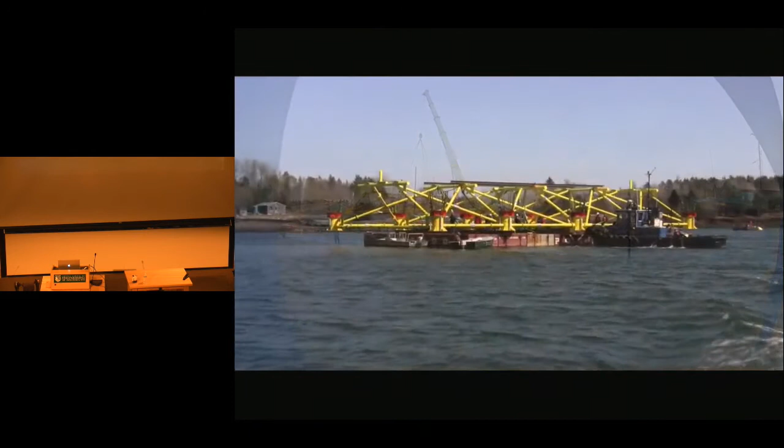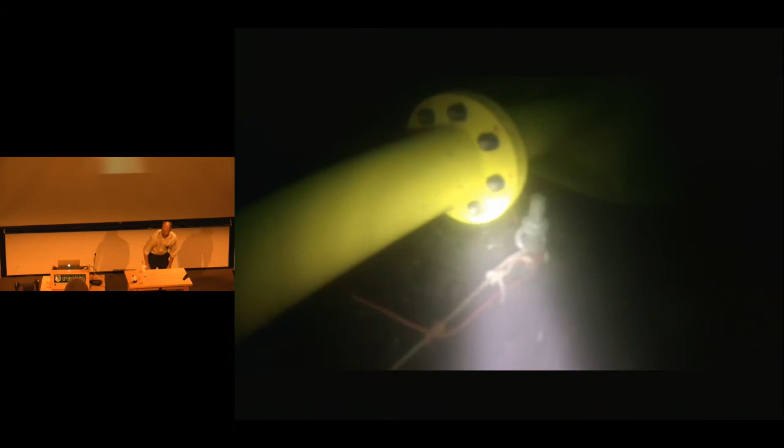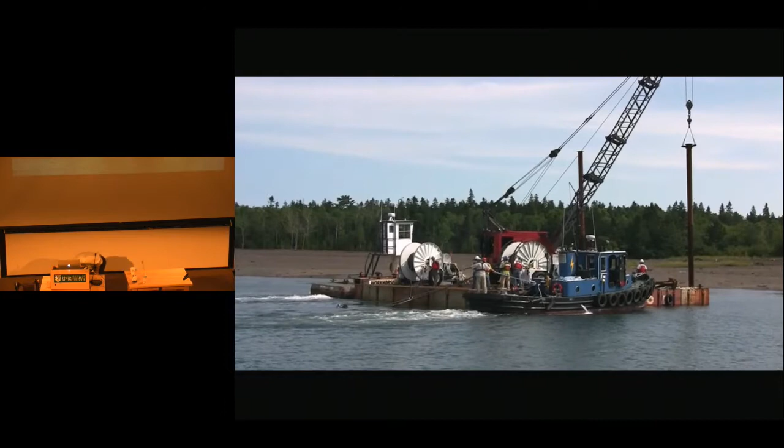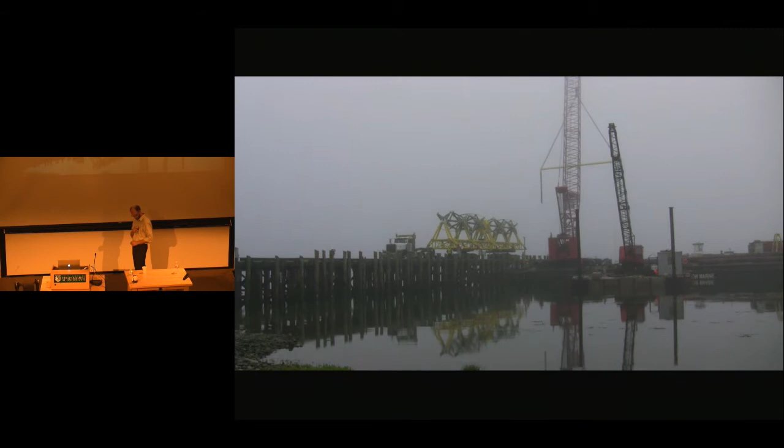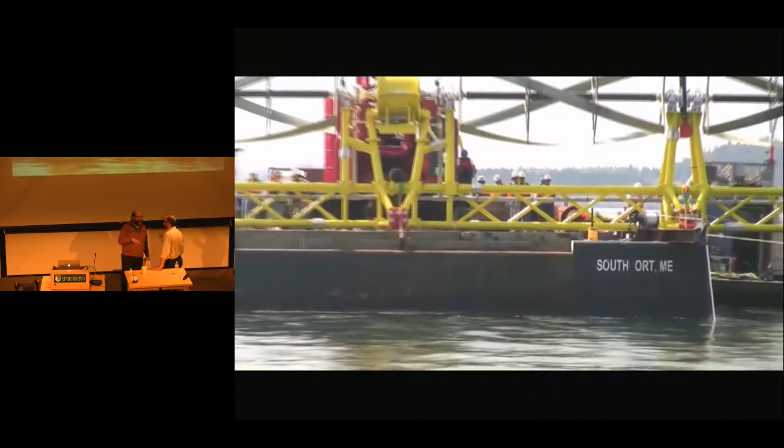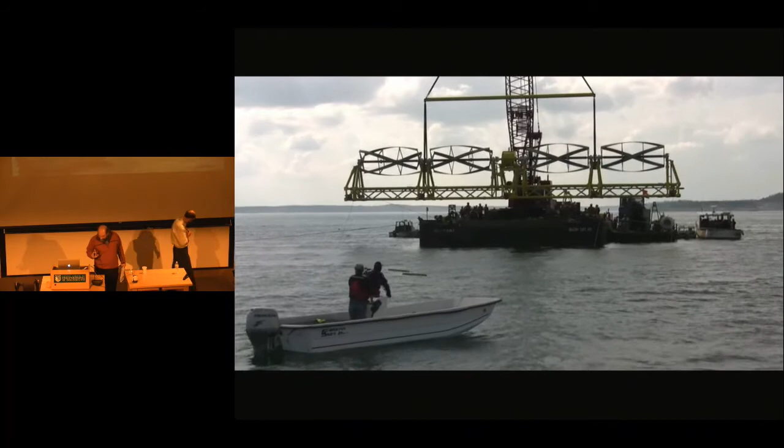Do you have the tone? I took it off. Oh yeah, all right.

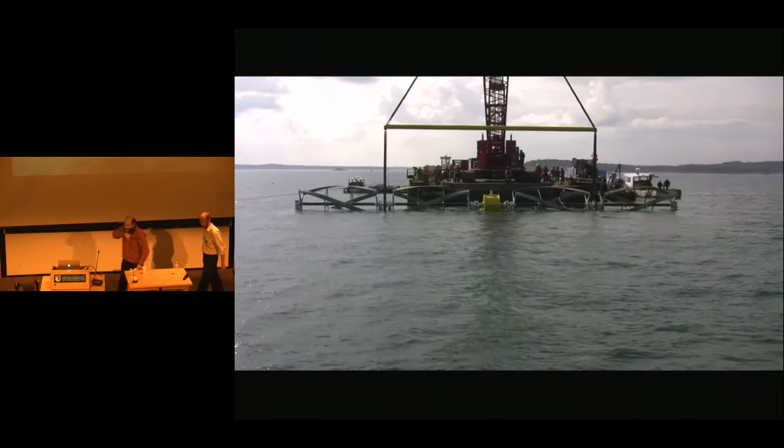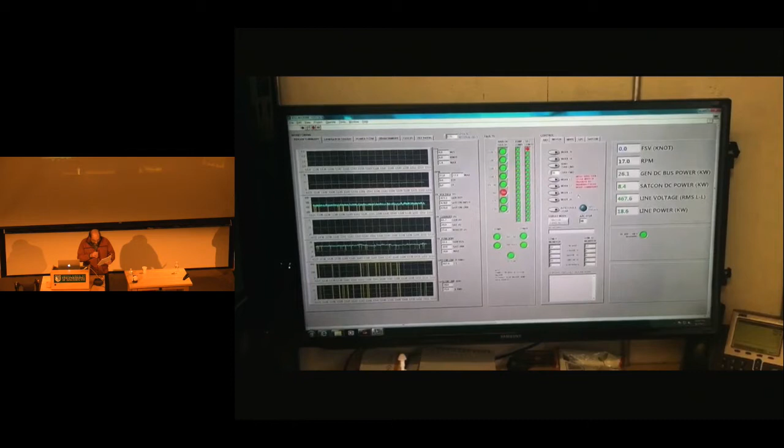Good afternoon, everyone. Our speaker today is Jarlath McEntee. I introduced him earlier today as a real engineer, meaning he's actually licensed by the state of Maine to call himself an engineer, something I haven't achieved yet. Jarlath was also a classmate of mine some time ago, and he's here to talk to us today about technical innovation in a regulated world, how to do something new in a world full of rules. A little synopsis of his career: he's the Vice President of Engineering for ORPC and the Chief Technology Officer for the same company. He drives development of the company's proprietary hydrokinetic energy technology. He earned his Bachelor of Science in Engineering at University College Dublin in Ireland in 1986, and his Master of Science at Dartmouth College in 1989. He comes to ORPC after spending more than 25 years in engineering and project management, having developed technical expertise in tidal power turbines, combined heat and power systems, Stirling engines and refrigeration systems, control systems design and analysis, micromechanical structures, and marine engineering systems. Please welcome our speaker.

So first of all, it's really a real pleasure to be... what about it, turn it off. Class. Okay. We're getting there. Should be on, yes, the little green light is on. All right, sorry about that everybody, it was my screw up. Hopefully we'll work now. So this is on? Doesn't sound like it. Oh, okay. All right.

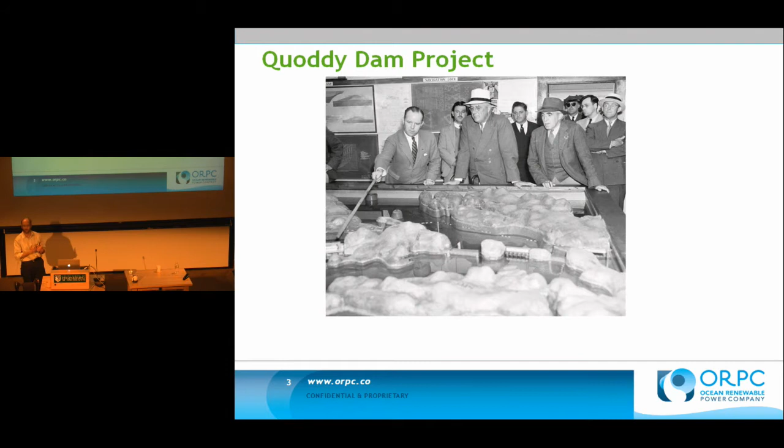The other main electrification project happening at the same time was the Tennessee Valley Authority. Now, one of these you hear about and one of them you don't. The TVA got funding from Congress to continue the work, and the Quoddy Dam Project had its funding cut.

Around the Cape Cod area, we really don't have very much in the way of tide height, and as you work your way down east along that coast, the tidal ranges increase quite dramatically. About midway up the coast where Eastport is, you'll have a tidal range of about 20 feet in a normal tide. And as you make your way up to that prong at the head of Nova Scotia in Minas Passage, tidal heights reach the range of 40 feet on a daily basis.

So there's a lot of energy here, and the question is why that's happening with this kind of geometry. If you think about it, seaward of Georges Bank, this shallow area where fishing happens, we've got tidal constituents, tidal forcing functions actuating on the ocean, creating a tidal resonance in that bay. So basically it's simply a big bathtub where the tides are sloshing in and out, and as you go further up into the channel, that amplitude of oscillation is increased.

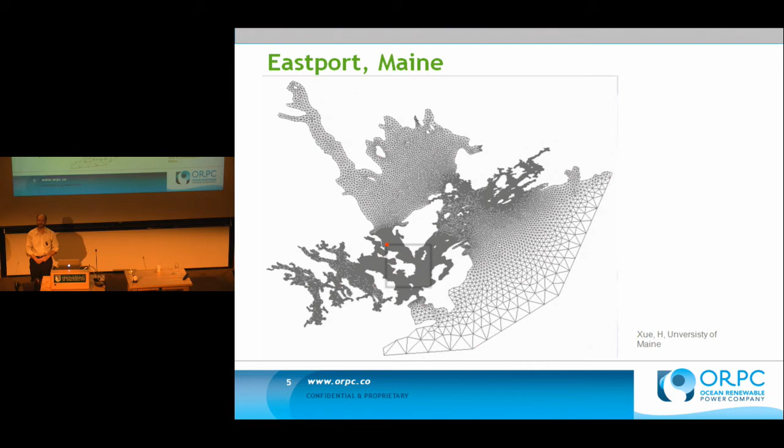The other side of the island of Eastport is Head Harbor Passage, which is one of the main shipping routes up into Canada, with very large tanker traffic through that channel. On both sides of the peninsula are actually the areas where ORPC is interested in developing projects, because that's where we have strong water flows.

One of the interesting things about the tides in Cook Inlet is they are very large, but there's also a very significant phase shift from one end of the inlet to the other, about a 3-hour delay in the tide.

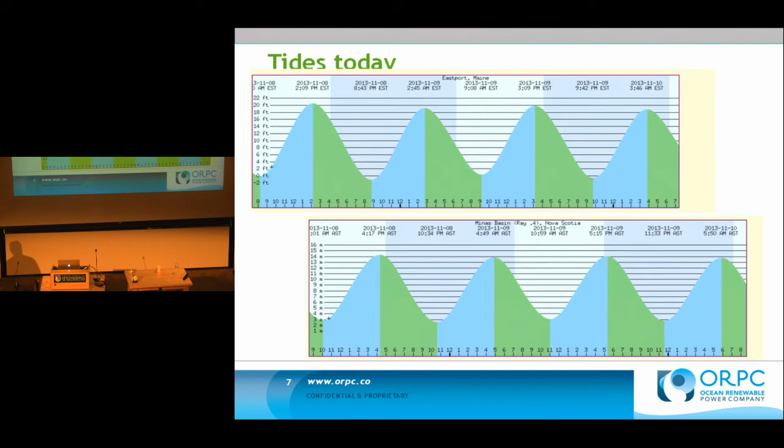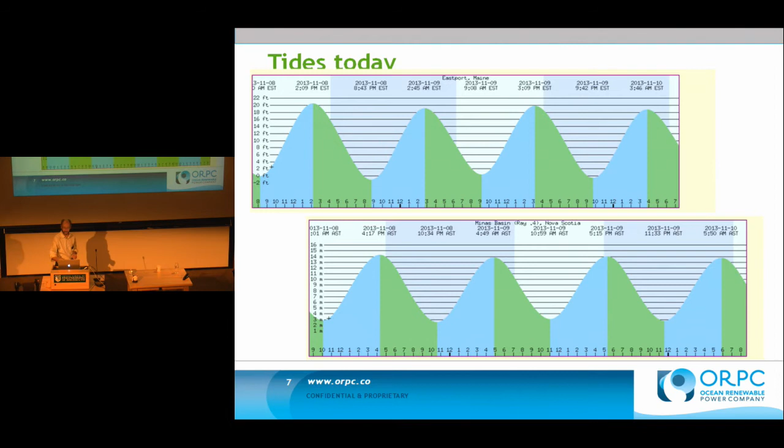I want to contrast that with wind, which is sort of a statistical, stochastic process—you get a gust, you may get a storm next week, you may get no wind for a week. It's a very intermittent resource. Tides are very predictable and pretty much always there.

In terms of the United States, I want to preface this by saying the U.S. is actually not the world leader in tidal resource. We've got good tides in Maine, Alaska, and Puget Sound in Washington, but other places are a little on the weak side.

What we do have is wave resources off the West Coast—very significant wave potential in the Oregon, Washington, and Northern California coasts. Between the two marine renewable technologies, wave and tidal, we're estimating that we could potentially serve 7 to 10% of U.S. national electric consumption. That's a pretty significant new renewable energy resource that no one's actually taken advantage of, and as we look to the future, we hope that becomes a reality we can deliver on.

Europe has a much higher potential. I don't have the exact numbers, but if you look at places like the Pentland Firth, the north coast, the coast of Normandy, and various other places near the North Sea, you have some extremely strong tides.

The other thing that's interesting when you look at developing power from the oceans is that the human population is moving towards the coasts. Right now in the world, 70% of the world's population lives within 200 miles of the coast, and that's actually increasing. People gravitate towards the coast—take a look at a night map of the United States and you see blinding lights on the east and west coast and a lot of dark spaces in between, other than maybe Chicago.

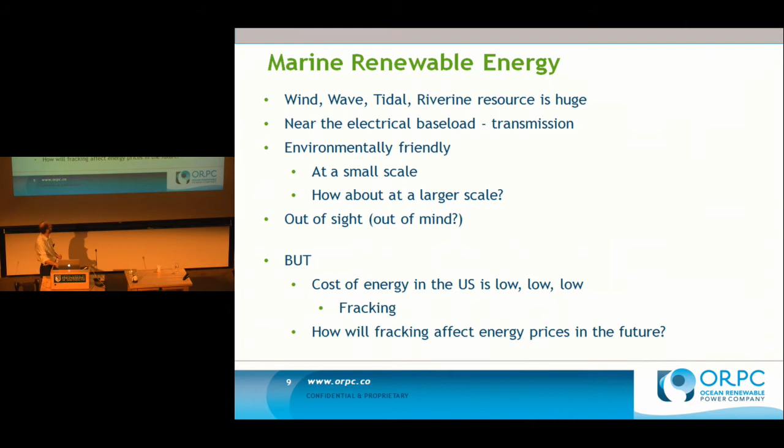So ORPC was established in 2004. The general idea was that we were going to develop projects. We were going to buy technology from someone else. And we saw all these wonderful pictures from European companies about these wonderful tidal turbines that they were developing, and then we go talk to them about buying them, and you found that you couldn't buy them. They didn't really exist. They weren't tested.

So we started developing technology of our own. We went through a technology selection process and came upon the particular arrangement that we have, which I'll talk about in a minute. And over the years, as we developed this technology and as we developed the project in Eastport, Maine, we've become somewhat of leaders in the U.S. in terms of permitting these projects and how to get them licensed. We've developed relationships with the regulatory agencies, with the communities, and a lot of other stakeholders. And that's actually been a very valuable thing for us as a company. We have very, very good public acceptance of our technology in the state of Maine, very good PR, frankly, and people want us to actually come to their communities and help them install these kind of technologies.

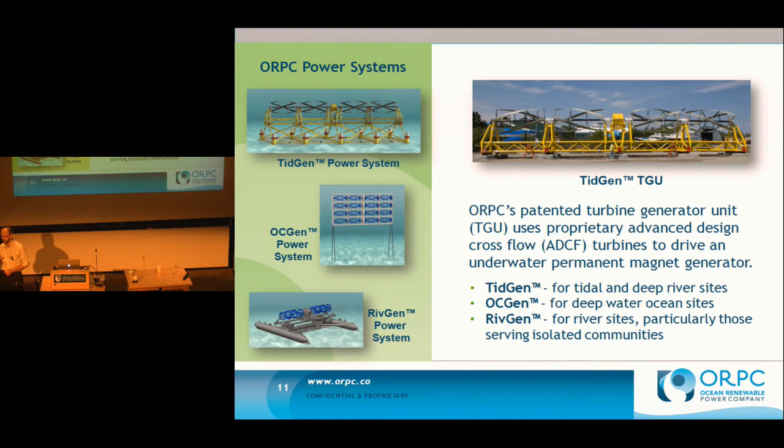All the technologies, they're all similar. They're all cross-flow turbine technologies. So this is sort of like an underwater windmill of a different type than you've seen before. They're all direct drive machines. There are no gearboxes involved. We took a decision earlier on that we wanted to minimize the mechanical complexity. And they're right now all permanent magnet generators, which generate DC power, which is transmitted to shore.

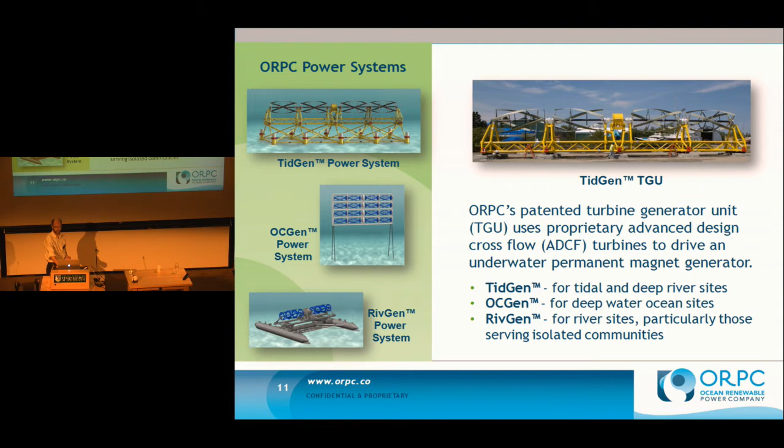I'll talk a little bit about the differences in these different hydrokinetic turbine technologies and maybe give you a feeling for why we chose one type over another.

In the late 70s and early 80s, in the wind industry, there was quite a lot of work going on in what are called axial flow machines. This is a cross-section of an axial flow turbine, basically your standard three-bladed wind turbine that you see everywhere now. It's the technology that won out in the wind industry for good reasons.

It's efficient, relatively low cost to build, and reliable. The other technology being developed at that same time was cross-flow technology, which is what we chose. The initial test results from cross-flow testing showed this technology wasn't as reliable as the axial flow machine. There were a lot of early-stage failures in cross-flow turbine technology.

Many of them out in the Altamont Pass in California. I don't know if anybody's driven through areas of Southern California where suddenly you come to a valley with towers and towers and towers of windmills, various designs. It was really a test center for various wind turbine designs in the 70s and 80s.

But there are certain things about this turbine that we actually like from a marine environment, and it's preferable to us to follow this technology route rather than the axial flow machine. These cross-flow turbines are actually beginning to see a resurgence in the wind industry as well, particularly in the small-scale domestic wind turbine business, and also in offshore floating wind. There's a couple of advantages they offer in the floating wind market.

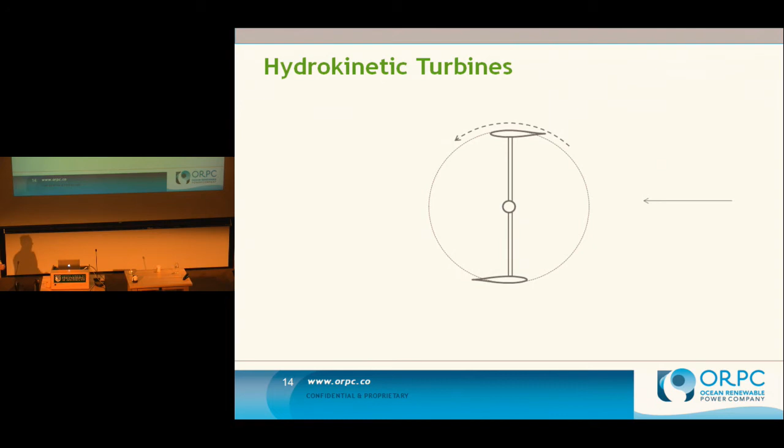This is a big advantage when you're trying to minimize the amount of mechanical structure and systems on a turbine. If you think again to your onshore wind turbine, it actually has to rotate into the wind. With a cross-flow vertical turbine, it doesn't have to do that—it just sits there and accepts wind from all directions.

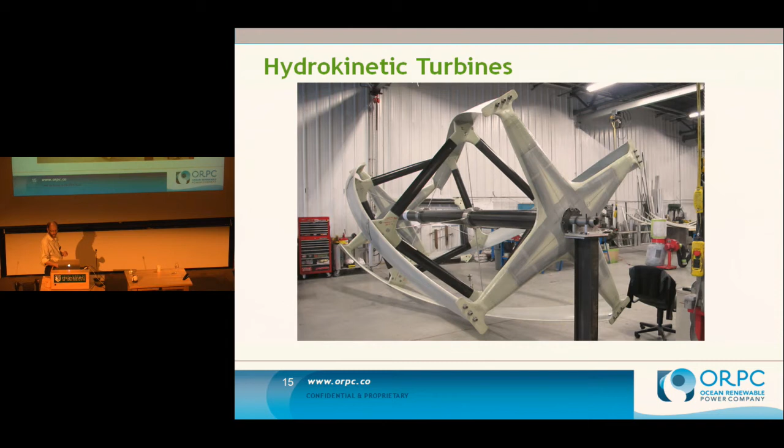Brendan's here, but if you want to look at Dr. Brendan Epps' models, you can get a sense of some of the torque variations that happen in a 2D model. The problem with this complicated helical 3D shape is that it's somewhat of a bear to do any kind of analysis on—it's a geometry problem that's befuddled me for 5 years.

Let me go back to the CFD stuff for a minute because some people might be interested in it, and it gets back to the work that Dr. Brendan Epps is doing here.

CFD, computational fluid dynamics - when I was doing my work for you, we were using Fluent, and Fluent back then wouldn't allow any kind of curvilinear boundary. It was basically block structures in 2D. The code was written in Fortran, and I got to look at it at the time - even I thought it was pretty ugly code. Fluent today is now a world leader in computational fluid dynamics, based over in West Lebanon.

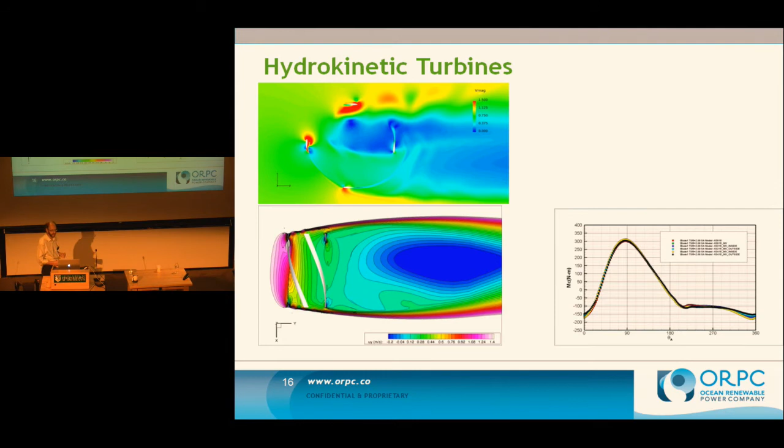The major area of research is still not quite right for cross-flow turbines. This makes me think there are problems elsewhere in CFD - the turbulence models that fit into these CFD codes need quite a lot more work done on them, I think.

The electrical generation - as I mentioned, we have a direct drive generator, so basically all 4 of our turbines in that TidGen unit are on one shaft. They rotate the shaft. We've got a permanent magnet generator. The voltage is proportional to RPM, so we've got a variable AC output from that generator.

We can't connect that to the grid. So what we do is locally rectify that to DC, transmit it to shore as DC, and then invert it locally to AC and feed it into the grid.

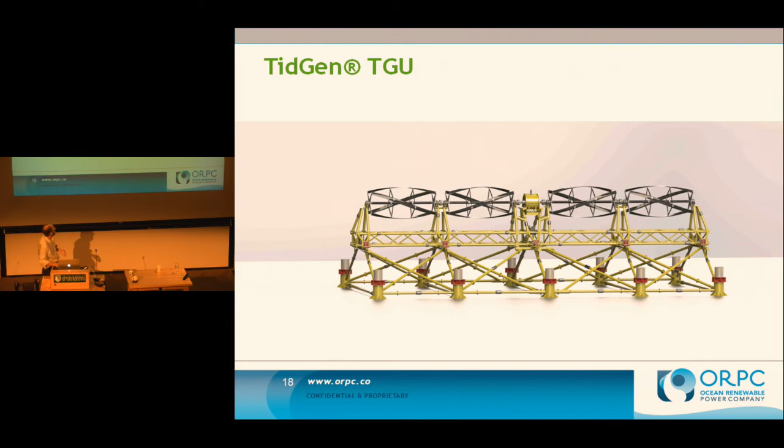There's an image of our system. You can see the 4 turbines, the common drive line. All that yellow upper structure sits on a bottom frame - that yellow lower structure is our foundation frame for the unit.

One of the reasons for doing DC transmission - if you look at offshore wind projects, you see people talking about high voltage DC transmission for multi-megawatt units 25 miles offshore. One reason is that DC transmission can be very efficient, especially at high voltage.

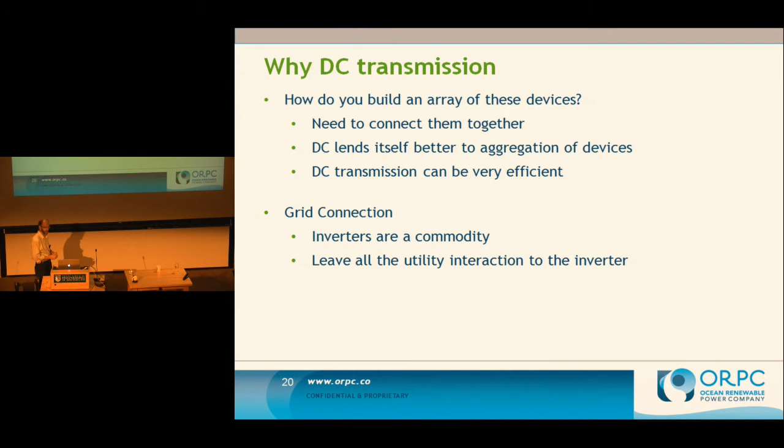But the reason we're primarily interested in DC transmission is that we have multiple units in an array out in a bay. We want to connect those units together and transmit that power back to shore in a single cable. We also want each unit to operate independently, at a separate RPM - we don't want to synchronize them. So DC offers a nice ability to do that. It's basically like connecting batteries together.

I just want to go through briefly some of the technology development.

2004, 2005 - you got to start small. You don't have any money, and you got to do things a little bit rough. So we made our first turbines out of wood, steamed in a steam box and made by a ship's carpenter up in Eastport, covered in epoxy.

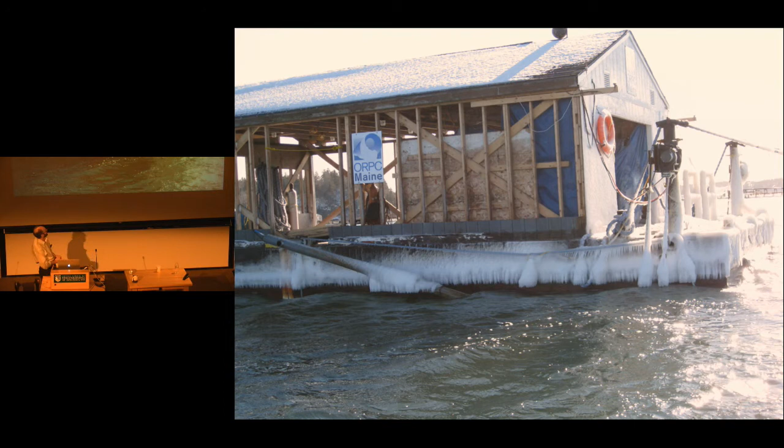And it worked. But part of the other problem about doing testing in Eastport in the winter is that you get kind of cold. So this is a typical day after a rainstorm the night before - the first day's work is to go chip the ice off the test vessel.

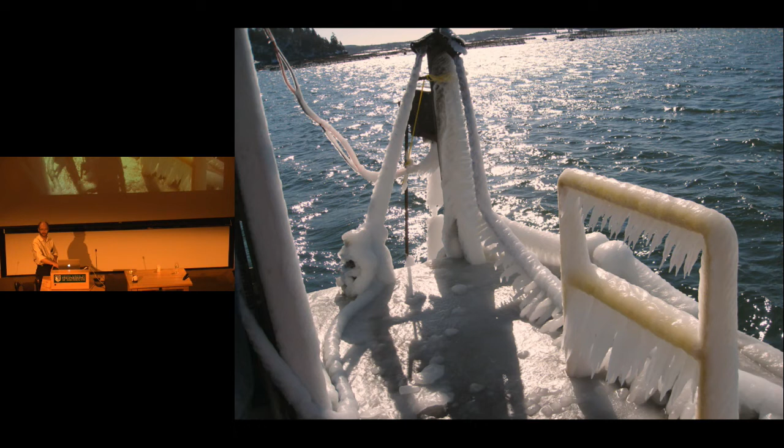We had an admiral from the Navy. Never have an admiral from the Navy as a technical advisor. His attitude was, you have no creature comforts - you can't have any walls on the vessel, you'll get blown around by the wind, no coffee, no pizza. He never showed up for the testing.

So we improved the test systems a little bit. We got a little smarter and decided to do the test work in the summer when the days are longer and it's a little bit warmer.

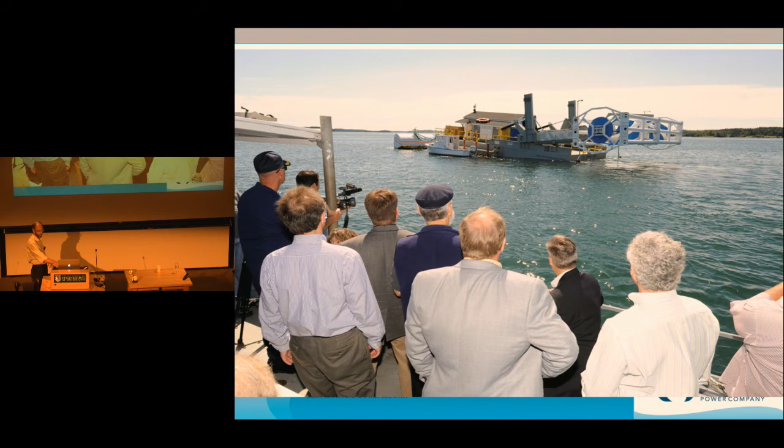We built a nice deployment vessel, which we actually just transferred ownership of to Maine Maritime Academy last week. We built our new set of turbines - you can barely see them behind the framework. And we started doing some testing again in the middle of the summer. Very nice.

It's pretty impressive to be sitting out there with 6-knot flows.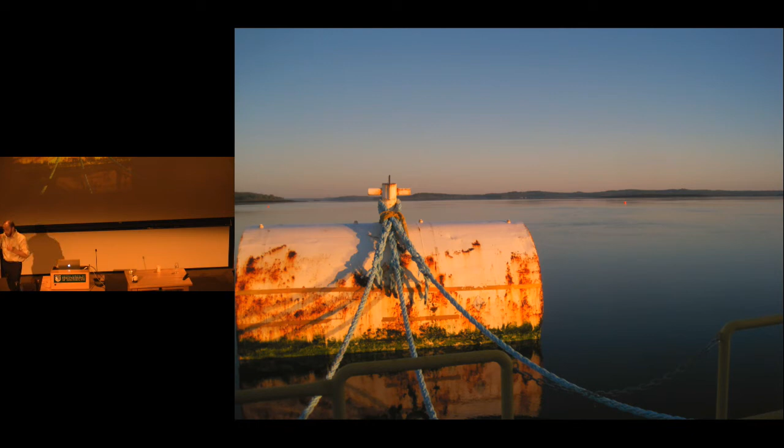One of the issues about tides is even though they're very predictable, they don't actually happen the same time every day, so there's a time shift over time. So if you want to do a 24-hour test, or get certain tide states, you end up going out on the water at weird times of the night or morning.

This is just one of my favorite pictures from doing an overnight test on the Energy Tide 2 in Cobscook Bay on a nice summer day.

All of that precursor test work is about developing the technology, understanding the technology. The next stage is to actually build it up into a product, into something that can be installed as part of a project. That's the real focus of ORPC in the last 3 years - to develop our TidGen project, our TidGen power system, and install it in Cobscook Bay.

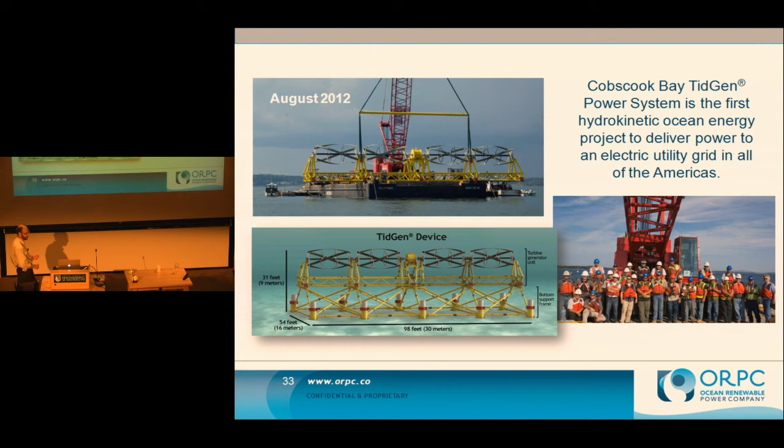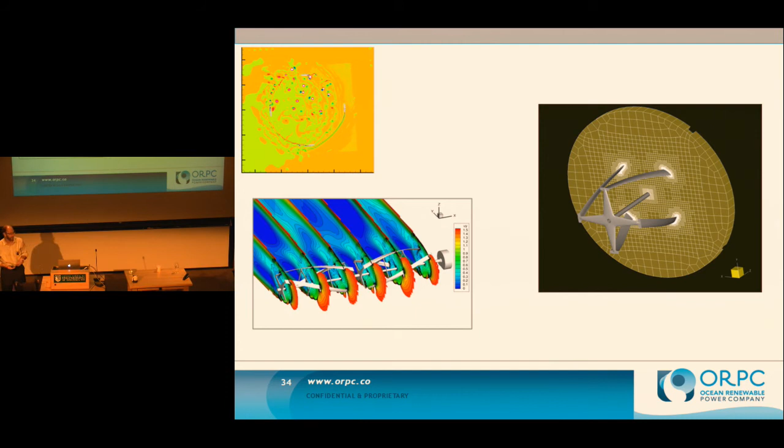We'll go through that. To get to that point, we really had to step up our game in CFD modeling, as I said. We were a lot more sophisticated in our modeling tools, and a lot more sophisticated in understanding the site conditions.

Before, we were talking about doing testing off a barge - you could just throw out a mooring and moor the unit there. Now we actually got to stick this thing to the bottom and hopefully have it stay there.

There have been some high-profile failures of people who put their units down and they fell over, or punched through the sea floor, or got their location off by 50 meters and the flow speeds were different than they had designed for and the blades fell apart. So site characterization is really critical.

We don't know enough yet - there's still a lot of work each and every time you put a unit down and decide where it goes.

So as an example of some of the work, we did some geophysical bathymetry work. You're looking for the depths, the type of bottom, doing some ground penetrating sonar to look for bedrock underneath. You're mapping out all kinds of things.

To confirm that, you actually have to go out and do geotechnical drilling. You've got to go get soil samples from different areas. And doing geotechnical drilling from a rig that's moored in 100 feet of water with a drill casing going down 100 feet, it's about that much around, at 3 meters per second,

suddenly you find some vortex shedding events that are pretty impressive. So we have images of the drill casing swinging sideways about a foot.

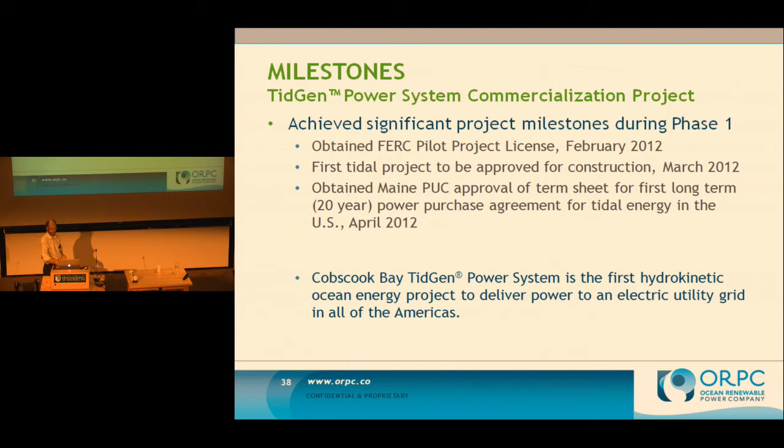This project is the first hydrokinetic ocean project to deliver energy to any utility grid in the Americas. So ORPC has gone from a pretty small company in 2005 and 2006 doing testing with wooden blades handmade in Eastport, to being a world leader—the leader in the United States, and if not in Canada. It's a pretty impressive roller coaster we've been on, and we're still going up.

Some pictures of the project installation: turbines on the top left, the turbine generator unit on the top right, installing the bottom support frame for the first time over here, installing the TGU for the first time over here. That video I showed looping earlier had a lot of the installation time lapses—we can take a look at that maybe if we have time.

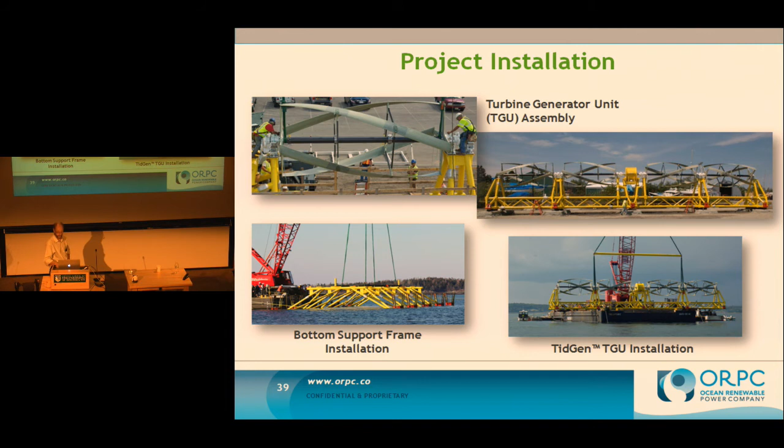So that's a lot of technology being developed. Some of it's new, some of it's just basic applied engineering—it helps to get the details right and do your work well. As I said, some of it's new: the CFD modeling stuff is cutting edge, and some of the electrical design work is cutting edge.

But all of that comes together into this wonderful project, or product, and you can't do anything with it unless you can bring it to market, unless you can install it and operate it. To install and operate a system like this in the United States requires going through a federal and state licensing process. The federal licensing process is the Federal Energy Regulatory Commission's licensing process for hydrokinetic projects, which is based off the same process used to construct, permit, and operate the Grand Coulee Dam.

So if you take something that has the potential size of the Hoover Dam and the Grand Coulee Dam, that same process needs to be gone through for our little 150 kilowatt generator. And I noticed today that the power usage for this building is something in the order of 400 kilowatts on an average basis, so we're talking about 3 of these things to run this building.

We've got to do an extensive agency consultation process and feedback process, listening to a lot of people, getting feedback from a lot of different agencies. That's at the state level, that's at the federal level. The federal agencies involved are a snapshot of all our federal agencies and processes, including the National Environmental Policy Act, the Marine Mammal Protection Act, water quality things, all the way across.

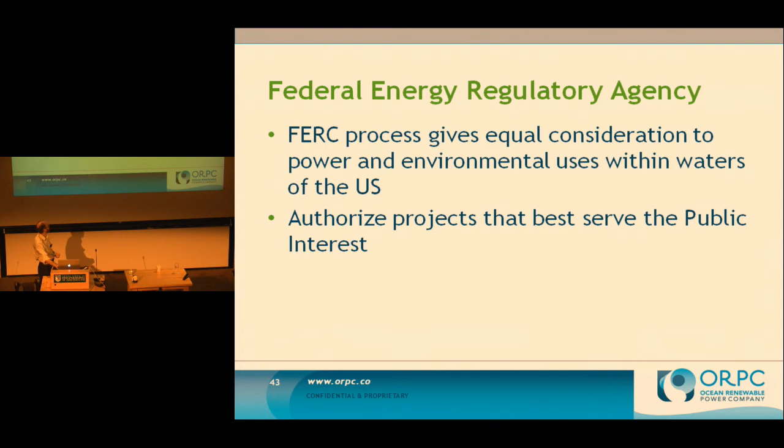FERC's mandate is to give equal consideration to power and to environmental uses, and that's a balancing act they have to make. Does it make sense to dam a river and create power from it, or is it better to leave it open as a canoe waterway? That's their decision to make, and it's not an easy decision. These projects have to serve the best public interest, and that's a high barrier to get through.

FERC also acts as a sort of clearinghouse. They actually don't do much of the work themselves. They sit in Washington and ask other people to provide their comments, so it's a distributed decision-making process.

Some of the federal agencies involved include the U.S. Fish and Wildlife Service, which has a statutory mandate to protect endangered species in the United States. I want to use those words again, statutory mandate — you told them this is the law, they have to do it. So if there's a salmon run in Eastport, which there is, it comes under the jurisdiction of the U.S. Fish and Wildlife Service.

NOAA, the National Oceanic and Atmospheric Administration, has the distinction of being the single federal agency that is sued the most often. The reason is that they're the ones who get to make these rulings on environmental projects and environmental effects. Their mandates are under the essential fish habitat laws of the United States, which basically map out huge areas of the ocean that are essential to fish stock. That's an extremely important industry for the United States, and it's important that we conserve and protect it.

The Marine Mammal Protection Act — okay, things with big eyes. Humans like things with big eyes, so we like marine mammals. I'm a little facetious about that. There are endangered species: about 350 North Atlantic right whales left in the North Atlantic. In Puget Sound, there are something like 86 orcas in that particular pod, genetically different enough from other orcas. In Cook Inlet, there are 350 belugas that are a specific genetic population. All of those populations of marine mammals are critically endangered, and it's a serious problem.

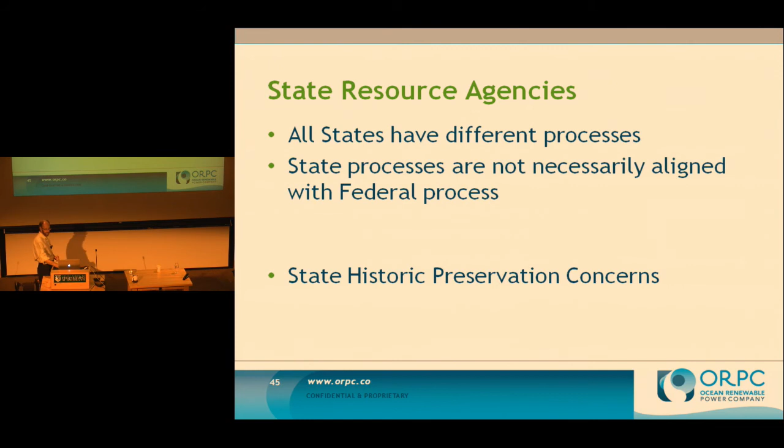The other stakeholders are the legal and state ones, and those are important. We've got to take good care of those. But the ones that are really important are the local community where you're trying to build this thing. In these communities, the most important stakeholder is the fishing community.

So we spent a lot of time doing outreach activities, talking to people, getting their feedback. I'll talk about it more later, but we've invested a lot of our energy in building public support at the local level for these projects.

And then the other stakeholder I keep forgetting about are the investors, the guys who have to come up with the money. Our major investors are the Department of Energy, from which we've probably raised about $22 million over the last 5 years, and private investors for another $15 million. So we're very heavily funded by the U.S. taxpayer. Thank you, I appreciate it.

But they have their own agenda, their own audiences that they need to report back to, and it's always very important to keep those people in mind and what they need.

As I said before, we've asked for these protections to be put in place, and as a society, we want these protections. But how do you balance that against the desire to create what we consider to be a new, novel, and good technology?

I'm generating electricity with renewable energy. I'm not releasing carbon. I'm not using fossil fuels. It's a good thing, I should be allowed to do it, right? But a lot of people in the past have said, I want to do it because I believe I'm right, and things didn't turn out quite so well in the end.

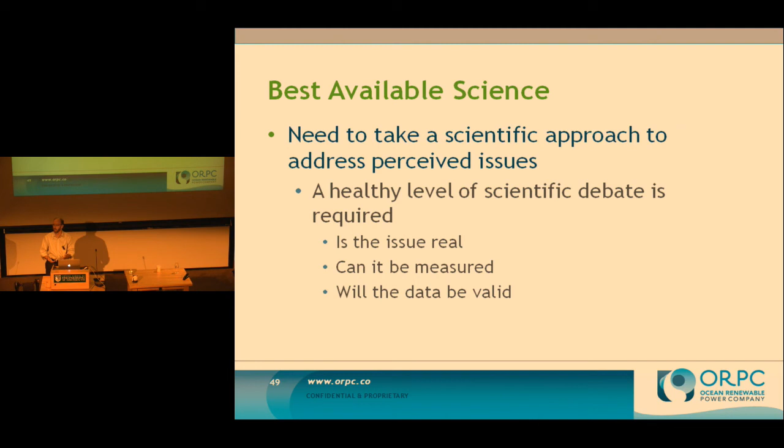That process is the way we've worked it, through an adaptive management model. I love these new terms that keep coming around every 5 or 10 years—this is the latest one, adaptive management. Essentially it means that as problems come up, you assess the data and change your planning and testing regime to address the new situation. So instead of saying at the beginning, I will do the test plan like this for the next 5 years, you actually stop every 6 months during that period and assess whether you're doing it right, and if not, you change it. It all sounds very sensible, but it's sort of new to regulatory agencies.

So a little bit about the study plans we actually do, the ones I agree are necessary and valuable. The first one is the Benthic and biofouling study. The benthos is the interaction zone between the sea and the sea floor, the muddy organic layer on the sea floor in which all the shellfish and invertebrates grow. It's a delicate area, and it's an economic source of fisheries in Eastport because two of the main fisheries are shellfish based: one is urchin, and the other is scallops.

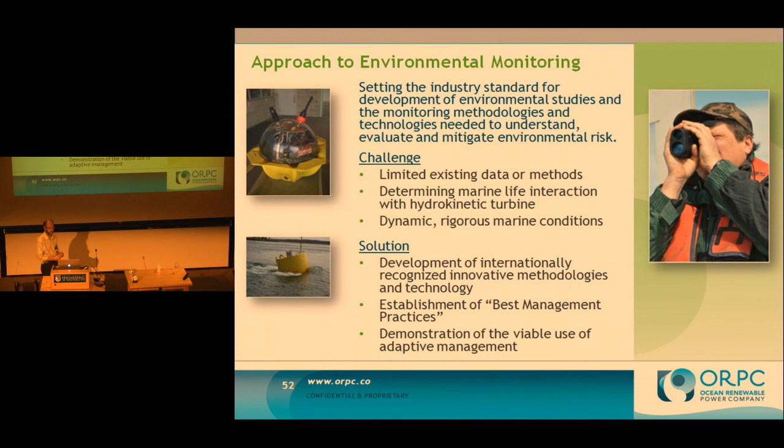As we develop these new technologies, people are asking us to do things in environments where it's not commonly done - you don't moor a boat in a 5-knot current, that's not the point of a mooring, you avoid the fast flow spaces. It's been really hard to collect data in areas with high flows, so we've been developing lots of different techniques and solutions for collecting environmental data, including acoustics and fisheries interactions.

This is an example of work done by the University of Maine, using commercial fisheries equipment - fish finders for commercial trawlers - to map fish signals over the turbine. Some of the blue dots represent fish, and the red structure represents the turbine. You can see some aggregation of fish in various places, but no observed mortality from their results.

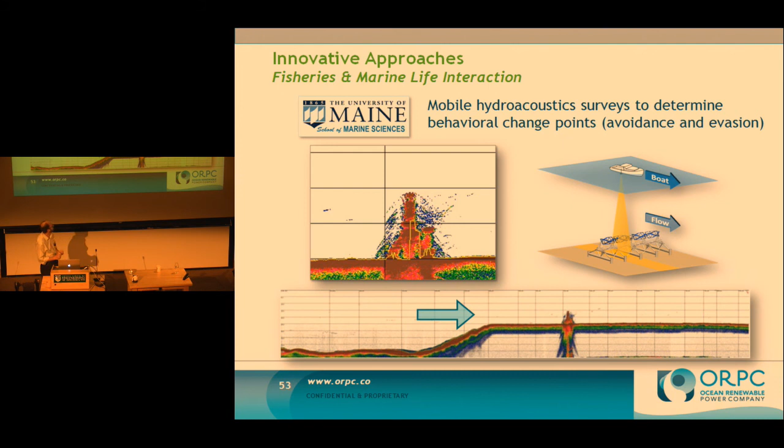Mammals are a good one, and this is sort of our catch-22 of our permitting process again. The best way to see things underwater is with sonar, but noise really annoys the mammals, so the agencies are asking us to go look for the mammals. So what do we do? We put a sonar in the water, but you need a permit to operate the sonar. So you can only operate the sonar like 2 hours a day, 12 times a month.

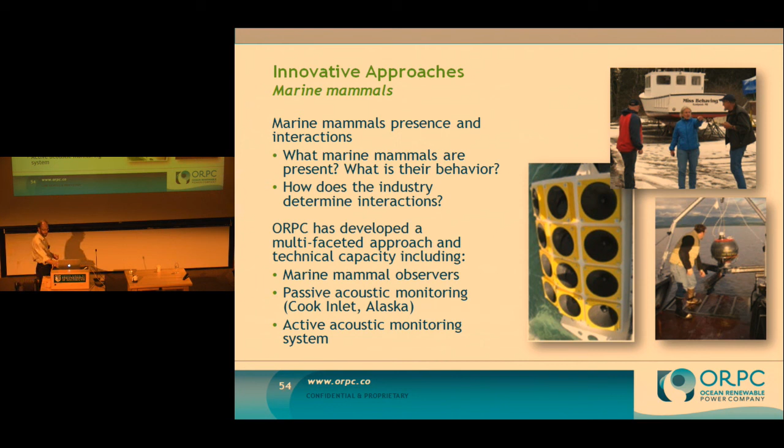We try to protect things, and sometimes we create more problems for ourselves than we want. So right now, in terms of our project, in terms of our studies, and in terms of the impacts, we have a renewable energy technology.

It's created significant economic development locally. We use a lot of the waterfront facilities. We use a lot of the local workforce and skill set to install and operate these units. And to date, we have no observable negative environmental effects created.

No strikes of fish or marine mammals, not just in our project, but in every single hydrokinetic project in the world. There has not been a recorded incidence of a fish mortality or marine mammal strike that I am aware of. And there's no indication of deterrent effects or barrier effects.

And the question we have to ask ourselves moving forward is, we do a lot of monitoring. It's very intensive. What's the appropriate amount of monitoring as you build out a project and make it bigger? That's part of the negotiation and conversation that has to happen as we move forward.

So to summarize, the thing I'd like you guys to take away from this, other than this is cool and maybe you can do it too, is that you understand technology development. You're used to it, and every day you go to the lab and you fight those problems.

But as you move things out into the real world, some things just crop up that you've never even thought about. And you don't have to be scared about it. It just is what it is. You just got to deal with it. But go out and deal with it in a way that's open and honest and inquisitive, and people will respect you and engage you and probably help you along.